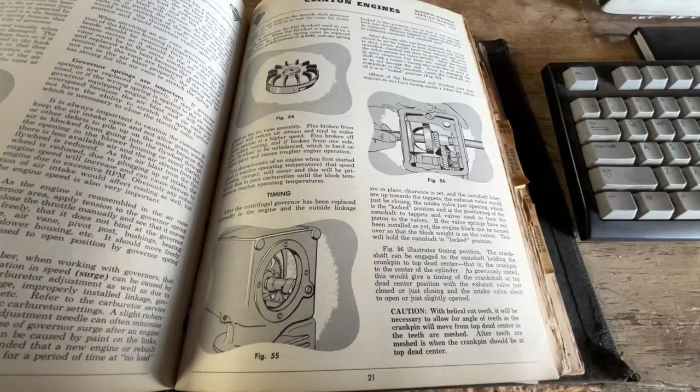All right, guys, I'm going to show y'all how to set the timing on this Clinton engine without timing marks. I'll just start reading with this.

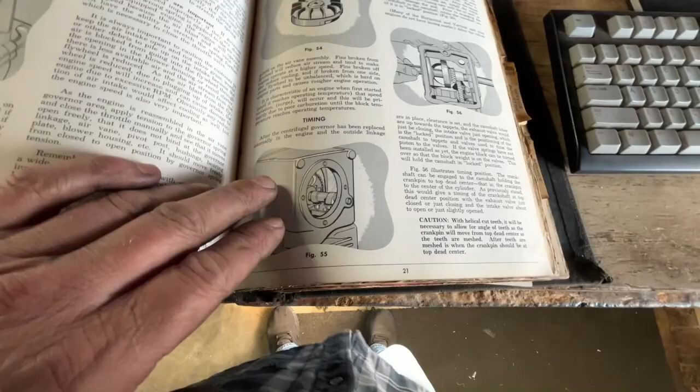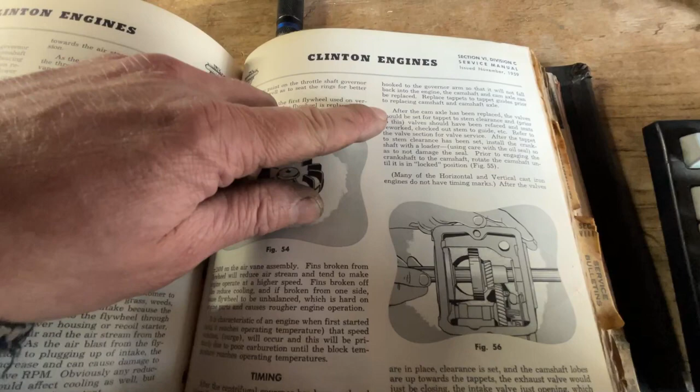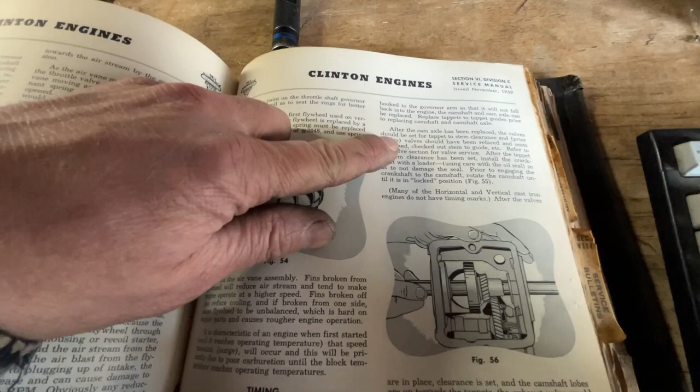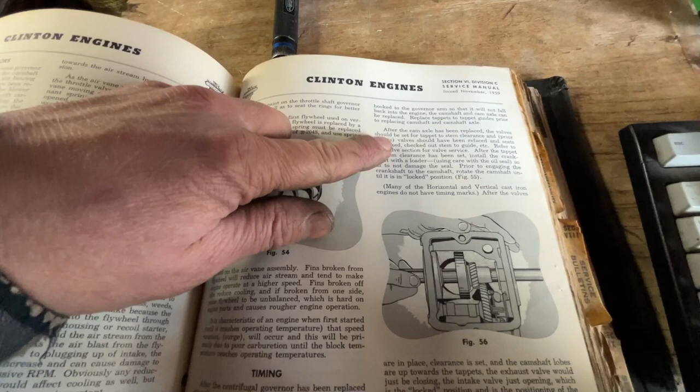After you get your governor installed, if you don't have it installed yet, just install it and get it in. After the cam axle has been replaced, the valve should be set for the tappet to stem clearance, meaning you need to check your air gap between your tappets and your valve stems. Grind it if necessary so it has the right clearance. Go ahead and get that done, install your valve springs, get all that set in right.

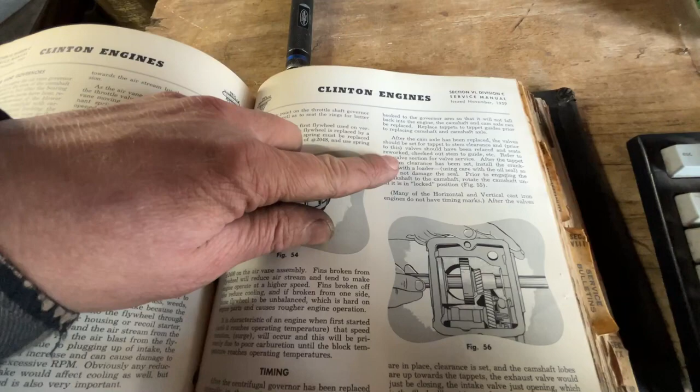Then, let's see here, the valve should have been refaced and seats reworked on your valves. Check your stem to guide fit. Refer to the valve section of the valve service manual after the tappet to stem clearance has been set.

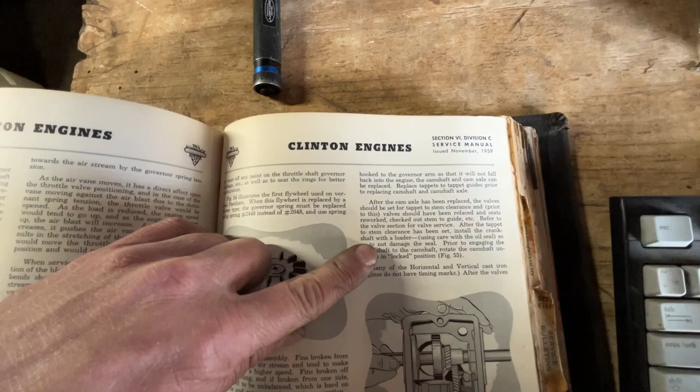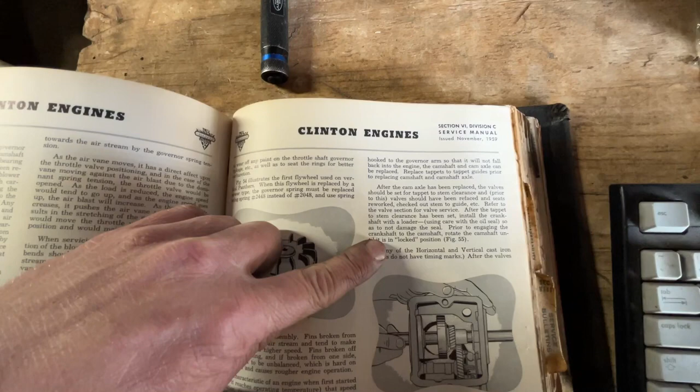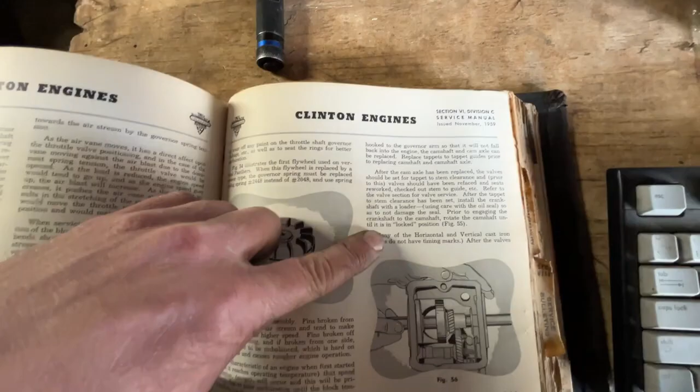Install the crankshaft with a loader, using care with the oil seal so as not to damage the seal prior to engaging the crankshaft to the camshaft. Prior to engaging the crankshaft to the camshaft, rotate the camshaft until it is in locked position. See figure 55. All right, here's figure 55.

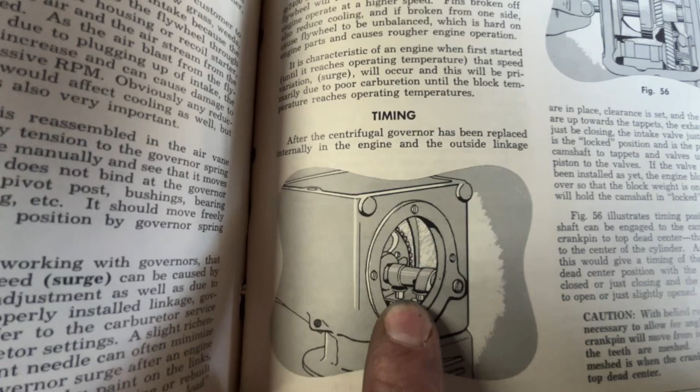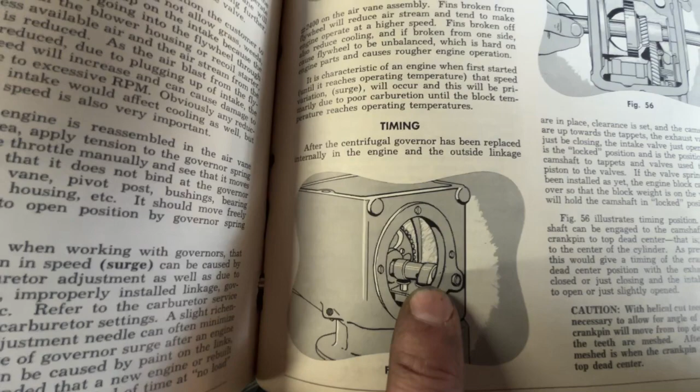And if you can see, our tappets are under load because the spring is holding them in position tight. And as you can see right here, your cam lobe right here is touching on this side, and the cam lobe on the other side is touching, and it is in a locked position.

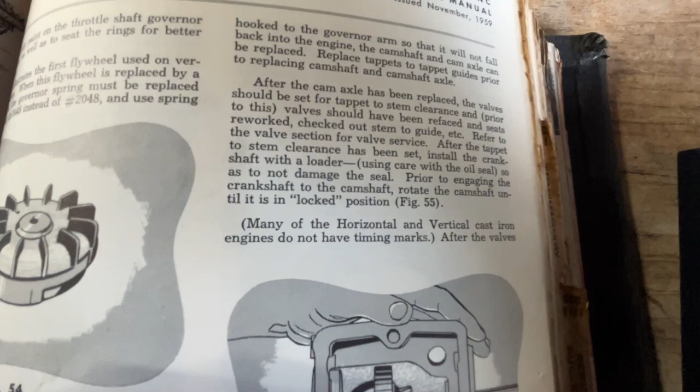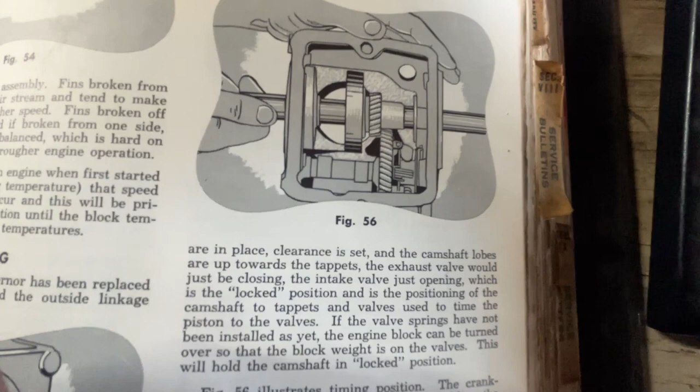Many of the horizontal and vertical cast iron engines do not have timing marks. After the valves are in place, clearance is set, and the camshaft lobes are up towards the tappets, the exhaust valve would just be closing and the intake valve just opening, which is the locked position.

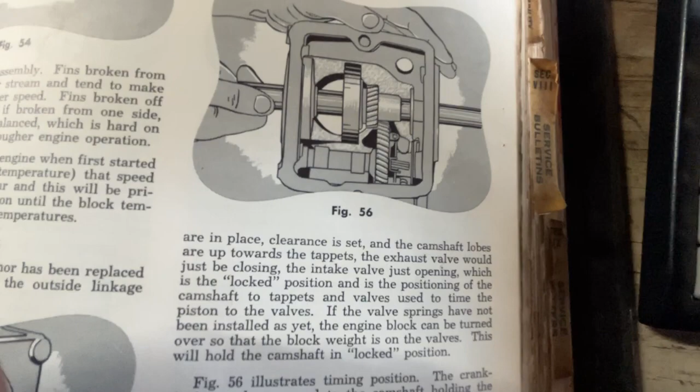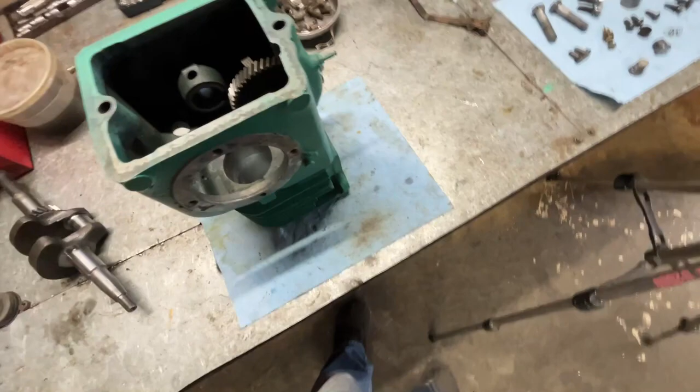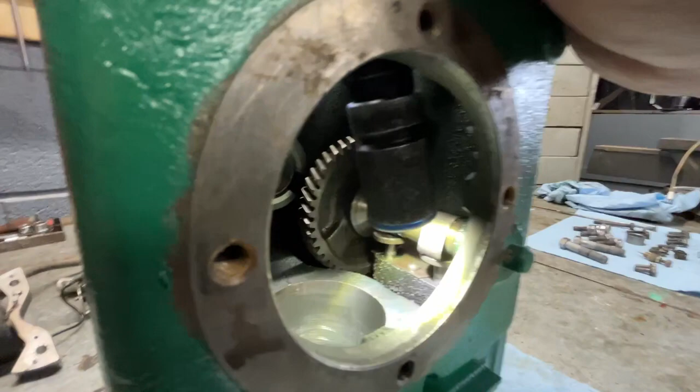Okay, let's go over here and I'll show you. Turn this sideways right here. Let me see if I can find my flashlight for y'all. Okay, so we have it as such. And I'll let you see, we can do this without the camera, without the flashlight.

Okay, when I move the cam, you see how it's in a locked position? See that, where it won't go? We can turn it and it will lift. It'll push your lifters up, but it's in a locked position.

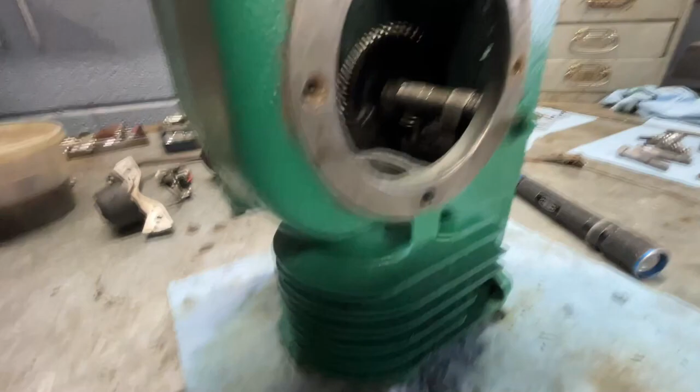If you do not have your valve springs on yet, the manual says you can just put it on a flat surface like this. I have my valve springs in already, so it's holding them in position, holding them tight. But it says you can put it on a flat surface like this so you can be in the locked position. Let me go ahead and spin this around.

Okay, now I spun it around. You see that's not locked? So that's not where we need to be. So let me... okay, all right, got it spun back around, and it is in a locked position.

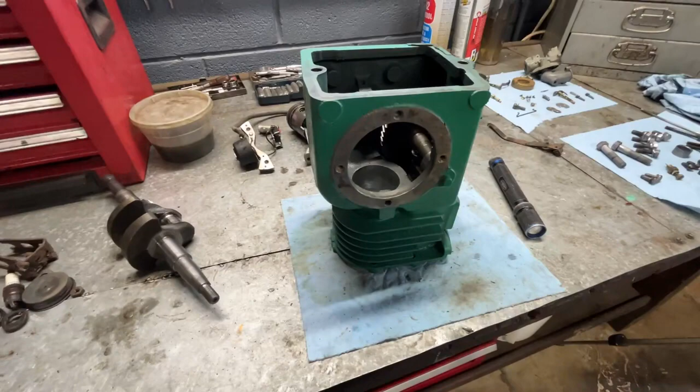Okay, once you have that in the locked position, it says to install your crank. I've got a new oil seal in there already. I'm just going to show you this right now. It says install your crank with the crank pin dead center of your cylinder, right there.

So it's going to go like this, like so, and it's going to want to be dead center, and that will get you close to top dead center, if not top dead center. So we'll put this on here.

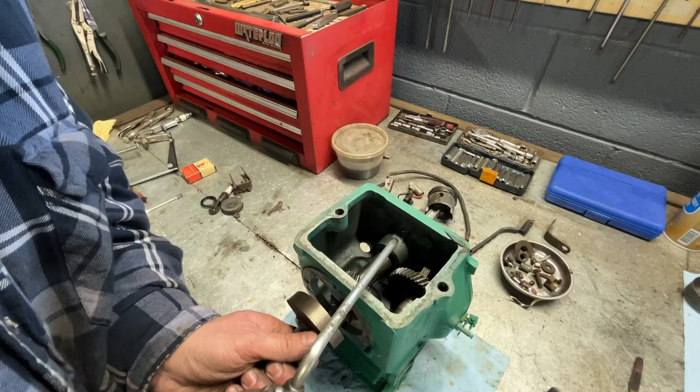Let me get y'all on the stand real quick so I can oil this up. All right, let me get some oil. I'll squirt that in this hole. Okay, all right, now let's get this worked in.

All right, and I'm gonna want that as close to... I can't get y'all directly. I want to get the crank pin close to dead center as possible, like so, okay? And then I'm gonna work it into the gear. You'll have to finagle it a little bit until it slides in. But once it slides in, let's see.

Okay, that doesn't look exactly... well, yeah, that's pretty close. It could be probably right there, maybe. That looks pretty close to me. So right now we have it pretty close to top dead center. I'm probably gonna try to pull that out and get it aligned a little bit better, okay?

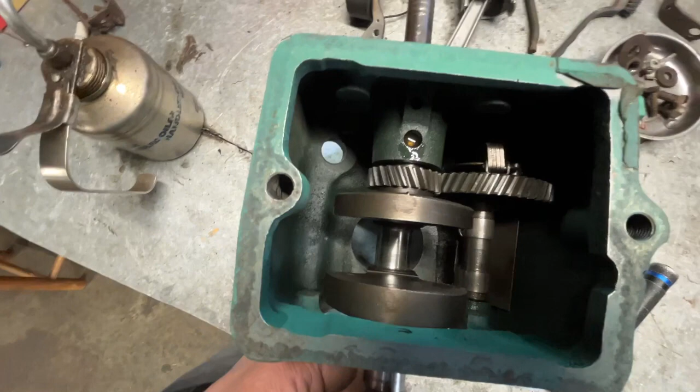I'll be right back. All right, I've worked with it a little bit, and we're pretty much top dead center, as you can see, or that camera's making it look like it's off, but it's not. See, our crank pin's in the center of the cylinder. All right, and we have a load on both exhaust and intake. So that is top dead center, and that's how you set your timing on these Clinton engines without timing marks.

See if I can get y'all back down in here. You can see the tappets are still locked in place. I hope that helps y'all out.